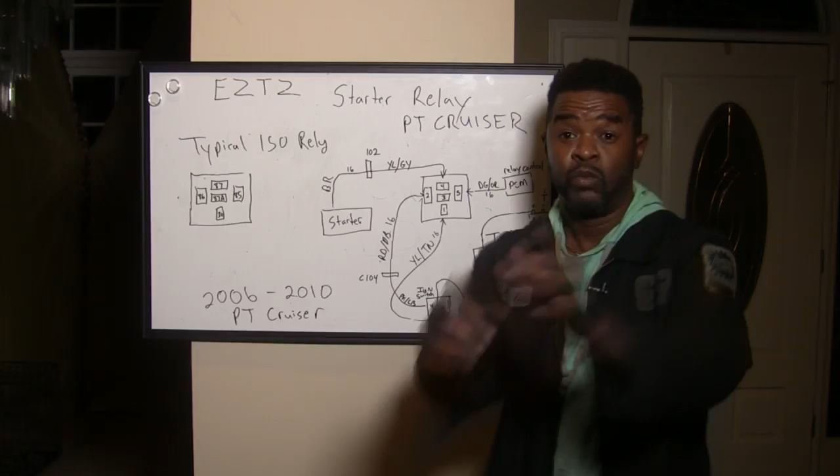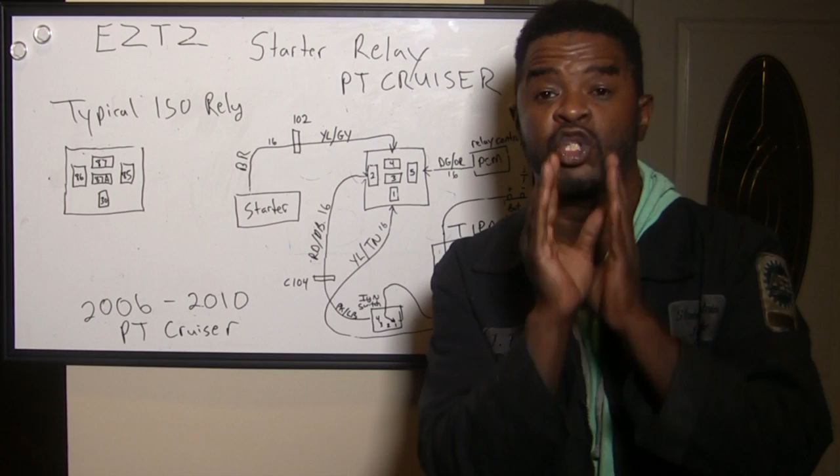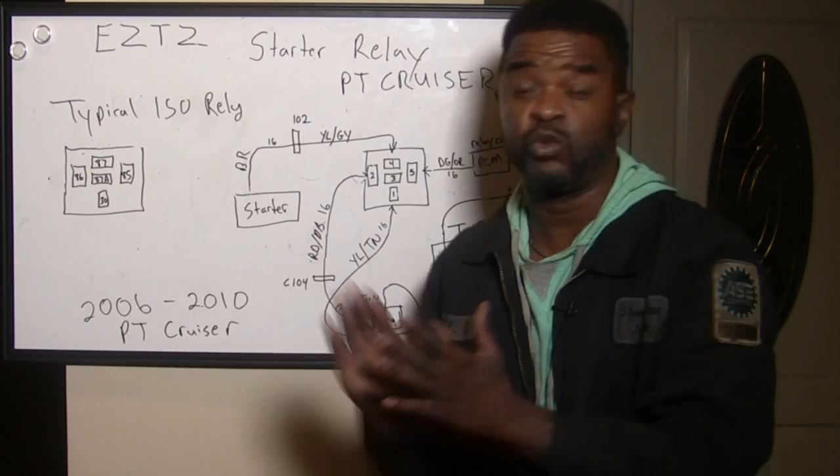I want to go over the typical starter relay. I had a buddy send me a message a couple of days ago. He happened to be working on an 08 PT Cruiser. In this video, we are basically dealing with a 06 through 10 PT Cruiser, but this diagnostic applies to all cars utilizing a typical ISO starter relay.

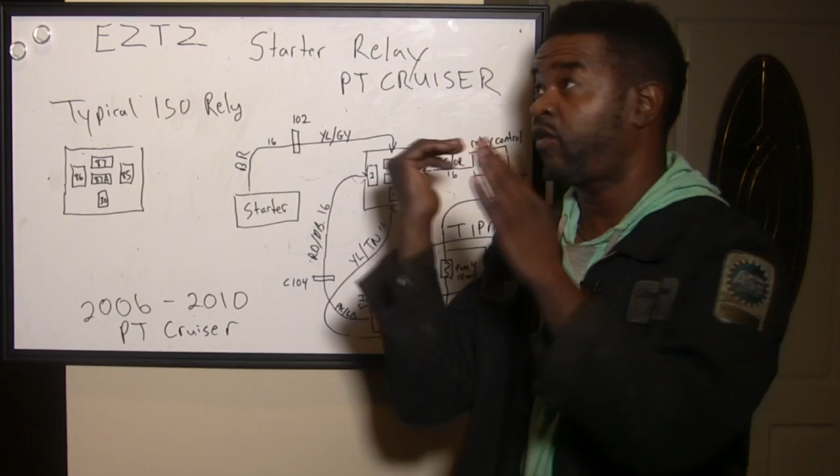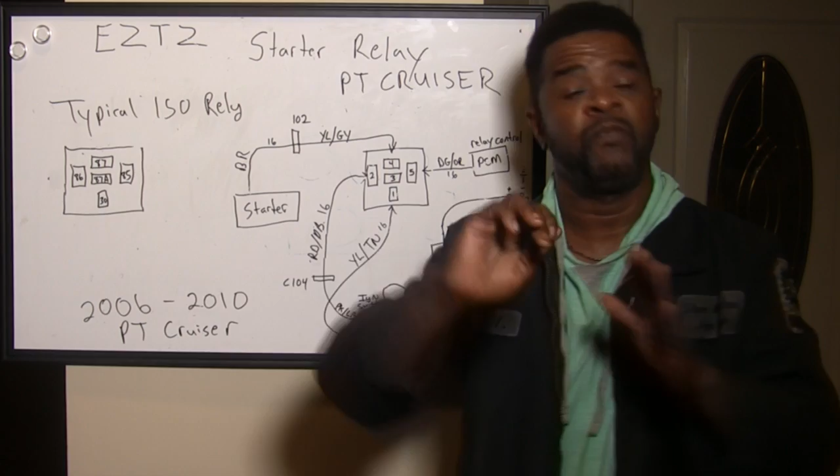And pretty much most of them utilize a starter relay to send power to the starter to allow cranking. Also keep in mind this video is for a no crank complaint, not a no start. So if your car's spinning over, cranking, this video is not for you. We're dealing with a no crank, meaning when you turn the key, nothing happens. You hear absolutely nothing. That is a no crank.

We got to get that description and that complaint accurate, so the technician working on it could have an understanding of what you're talking about. So we're dealing with a no crank and a typical starter relay. We're gonna go over all this diagnostic when we get back.

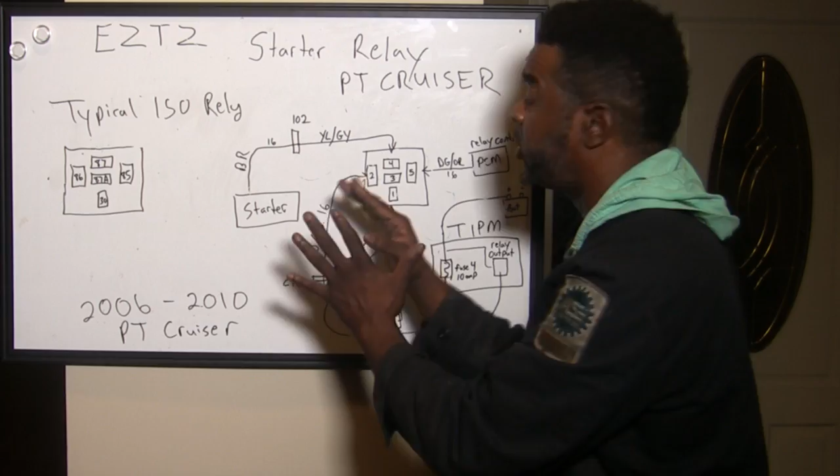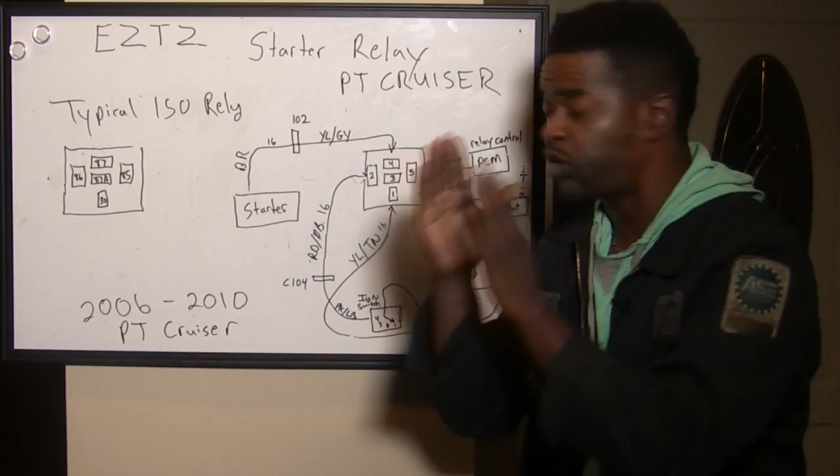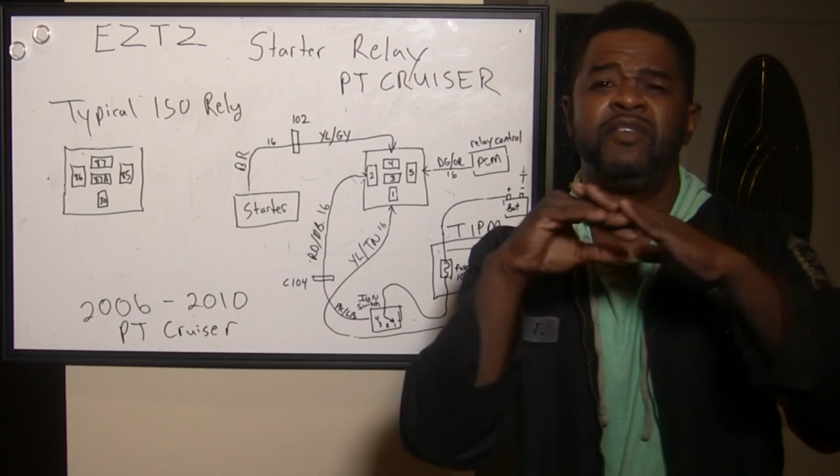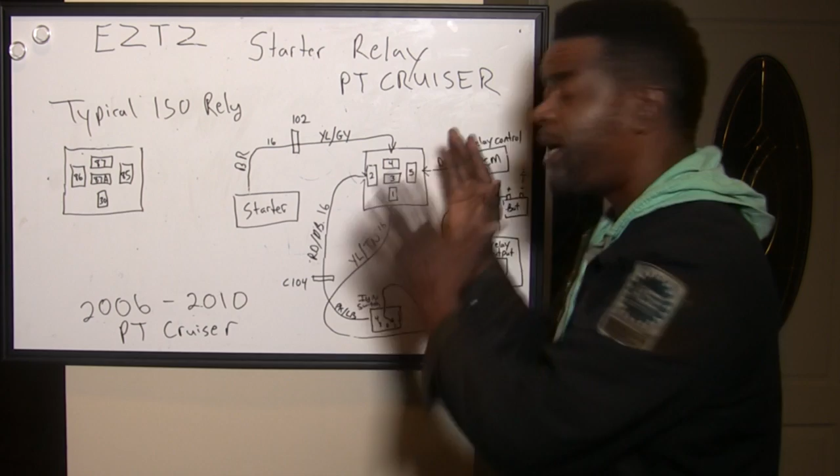We're talking about a no crank situation on a PT Cruiser. But this diagnostic applies to all cars. So I'm not going to even name the video. Well, I may name it PT Cruiser just to draw in the PT Cruiser crowd, because we're basically dealing with a 06 through 10. That car came out in 01, but from 06 to 2010, the electronics changed. So the same theory applies to the typical starting circuit.

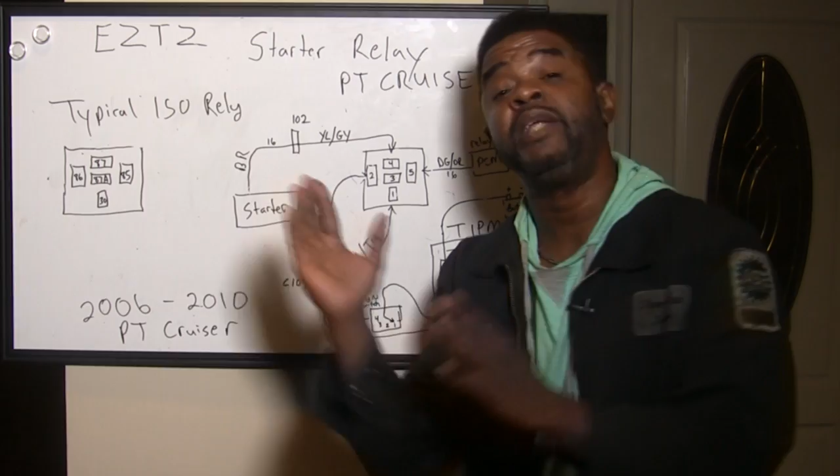Let's go over this typical ISO relay. You got a pin 30. Pin 30 is always gonna be hot, always have 12 volts on any relay, pretty much. And we're talking about a typical ISO relay, International Standard Organization. 86 is pretty much gonna be power supply from a switch. In our case, we're dealing with an ignition switch supplying a 12 volt switched circuit to the relay.

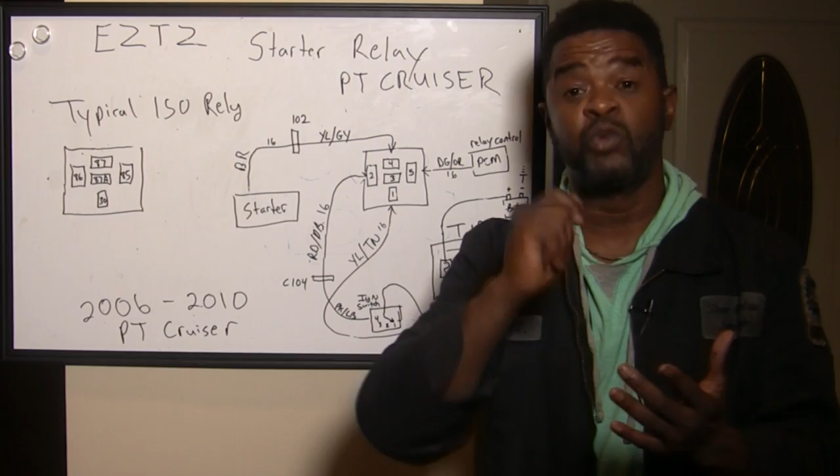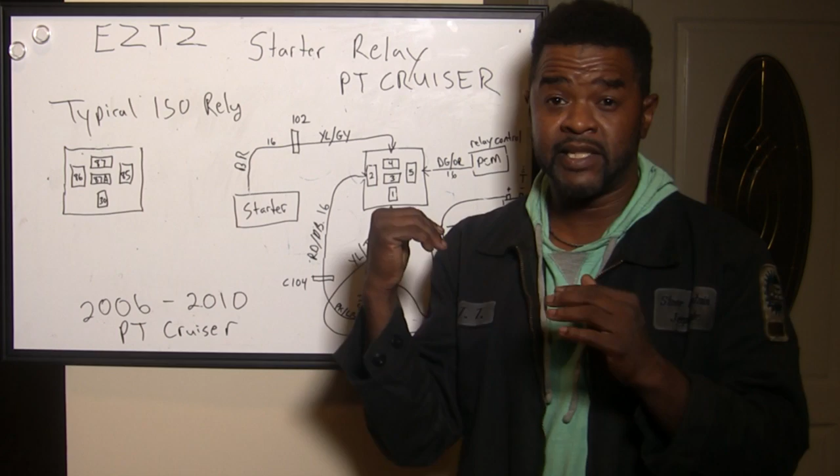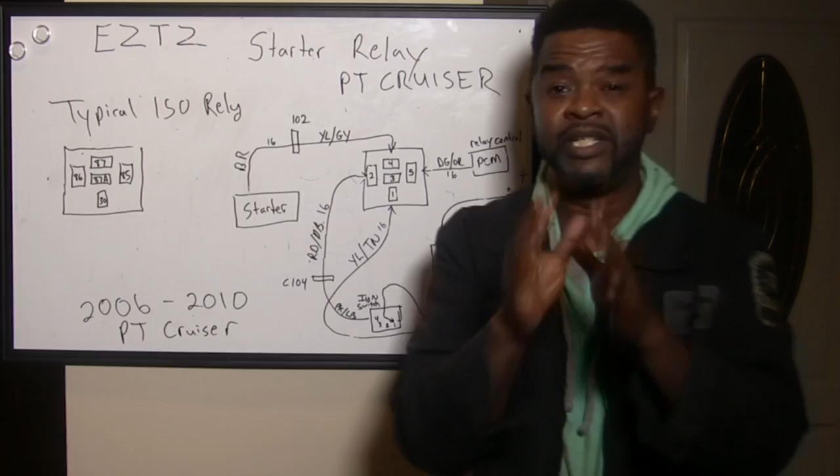Now, 85, not always, some cars utilize pin 85 differently. Some of them are hardwired ground, but in this case, we're getting that ground signal from a computer, the PCM. And 87 is actually the load, meaning it's going to send power to the circuit load in question. In this case, the starter.

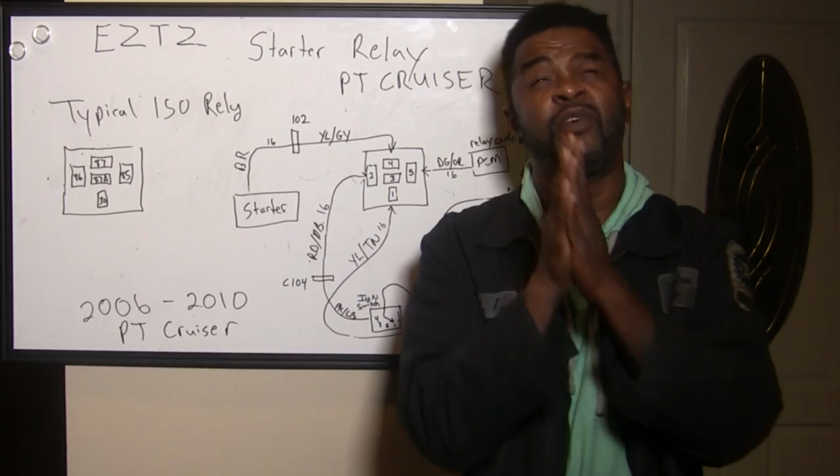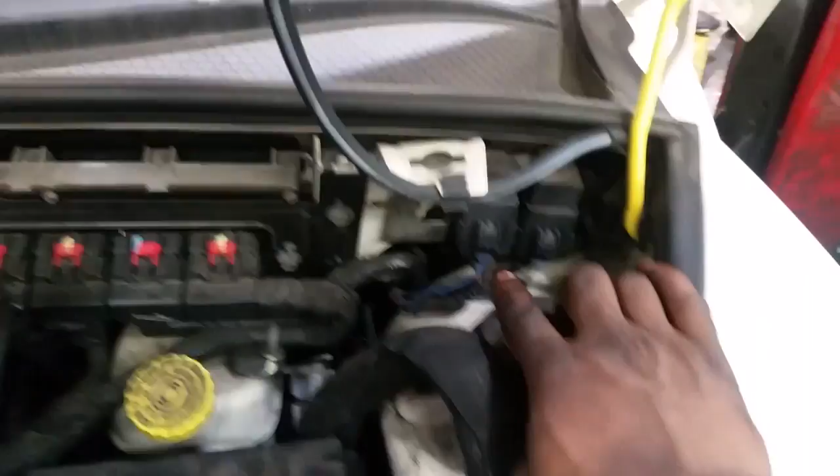Let's go over these pins. That starter relay on a PT Cruiser is on the driver side firewall. But you got to be careful because it's right next to the ASD relay, so you don't want to be diagnosing the wrong relay. It's on a bracket. Grab both relays. Look for the yellow gray wire, red dark blue wire, yellow and tan wire, dark green and the orange wire. But I can show you what it is right here.

Now let's go to the relay, because this is where the diagnostics come in. Remember when I said pin 30 always has to be power supply. In this case, Chrysler, in the wiring diagram, labels them 1, 2, 4, 5, 3. So we're going to do it that way. Pin 1 should be power supply. Grab your test light, hook it up to ground, and see if you got power supply right there. You should. If you do, good. If not, you got more diagnostics to do.

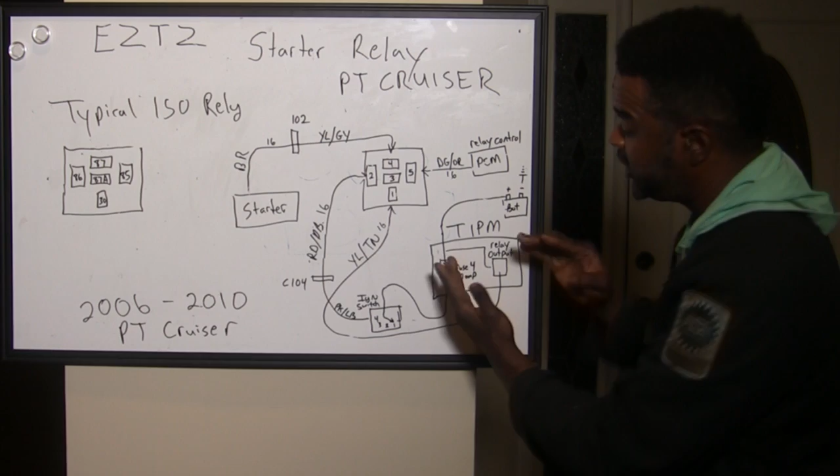Pin 1 goes to the relay output inside of the TIPM. So if you don't have 12 volts right here, chances are this fuse is blown. And if that fuse is blown, you got other problems, because fuses don't blow on their own. Because this circuit is only on the starter, if this fuse is blown, you might have a shorted out starter. But you need to do the proper diagnostic to find out if that's the case.

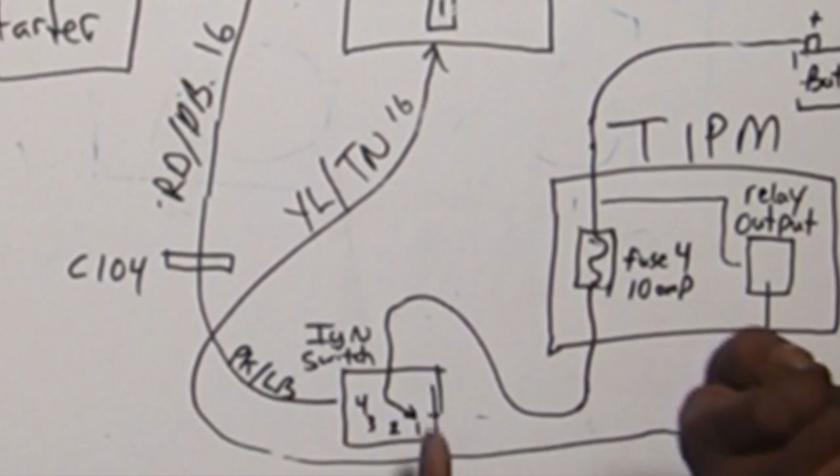Let's assume you got 12 volts right here. Let's move on to the other pin. Pin 2, remember I told you that's the switched power supply circuit. In this case, it's the ignition switch. The ignition switch is on pin 1. So when you turn the key, power supply should switch over to pin 4, which goes to pin 2.

Now, if you stick the test light right there on pin 2, if you turn that key and you're not getting 12 volts right there, again, you may have a blown fuse, because that is fed through fuse number 4, which is a little bitty small 10 amp. All right, 10 amp fuse, man. That's all they're protecting that circuit with.

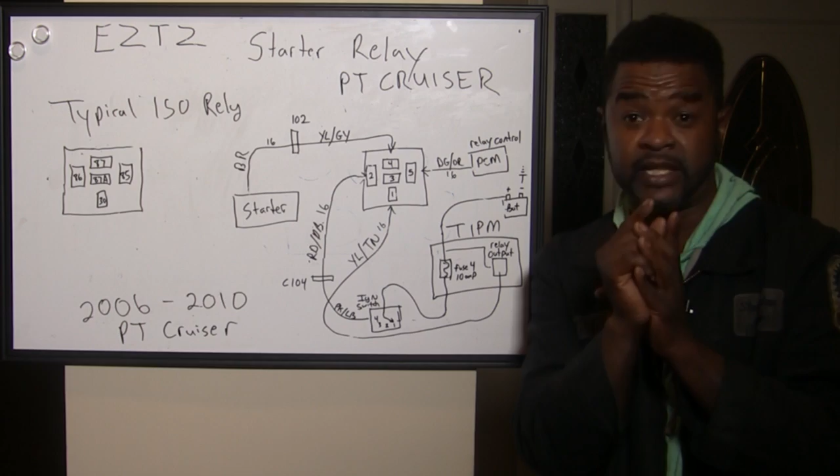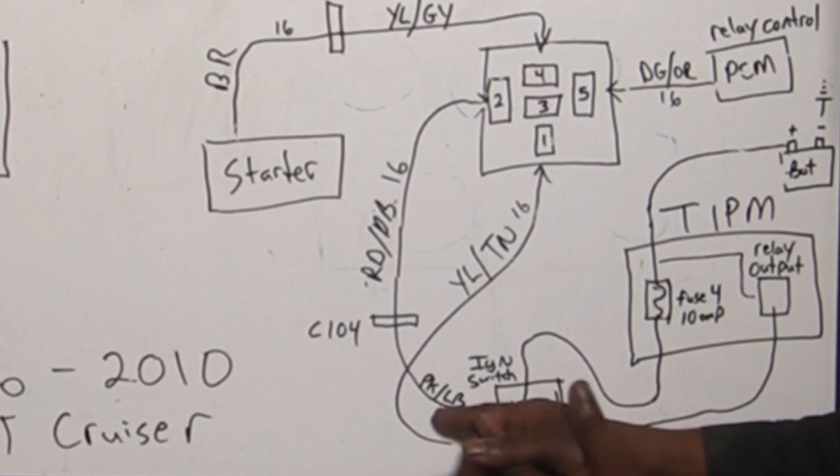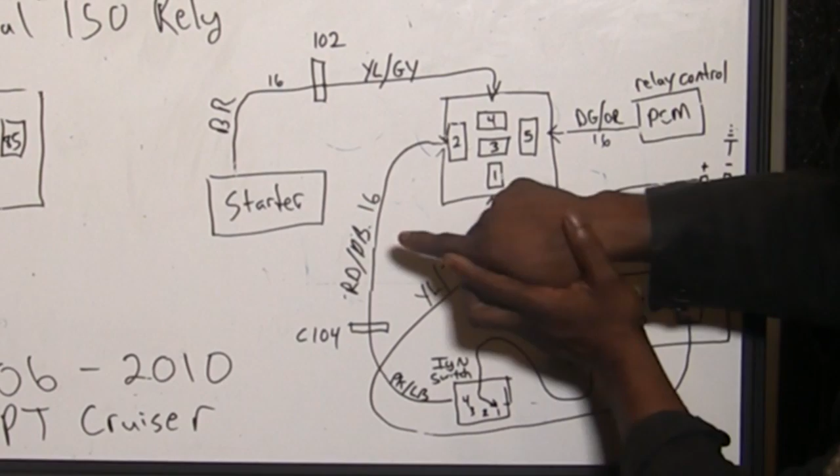All right, let's assume when you turn the key, you get 12 volts right there, because that's what you should be getting. Again, if not, you probably got a blown fuse, or open circuit and ignition switch, because let's not leave that out. All right, this is a pink and light blue wire, and that circuit goes through a connector, which is connector 104, and then the wires change color. All these are 16 gauge wires. The wires change color to red and dark blue. So at that relay, the red and dark blue wire should have 12 volts on it as you turn the key on and off. Let's assume it does.

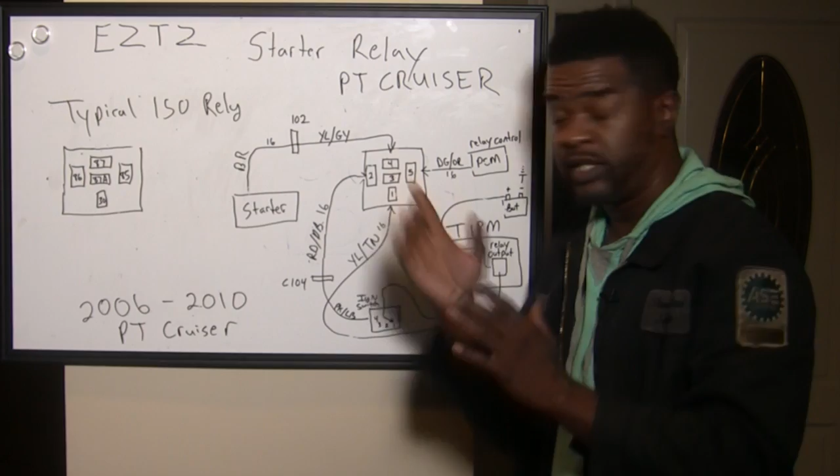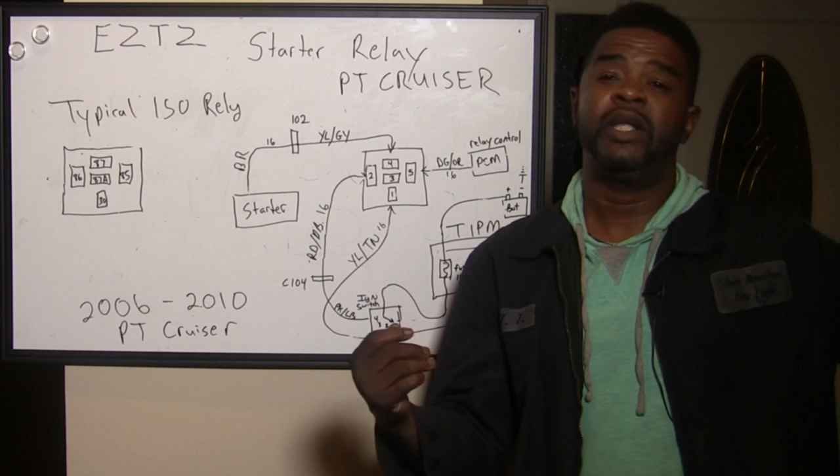Moving right along. Pin number 4, which is basically 87. Remember I told you that's your load circuit. That's going to the load that you wish to turn on. In this case, the starter is the load. All right, now a quick way to verify that this circuit is complete is to actually physically, manually put 12 volts on pin 4. So take your red wire, it doesn't have to be red, it could be any kind of wire, one end to a power supply, maybe the battery, and stick that same wire in pin 4. If that starter motor cranks, that circuit is complete.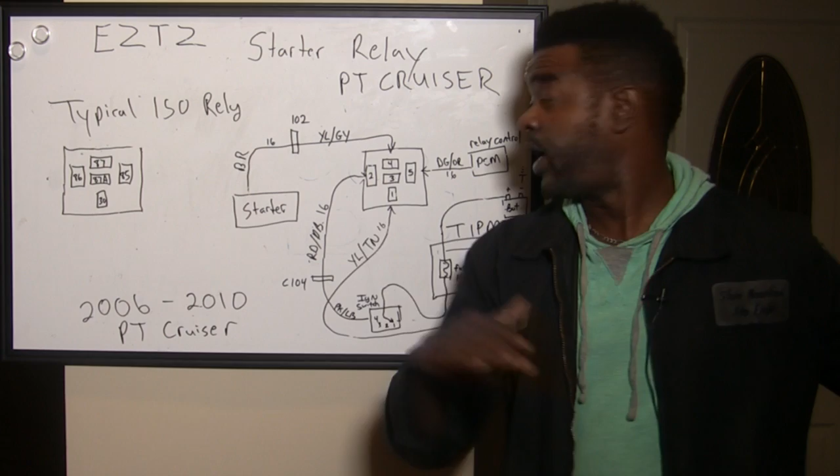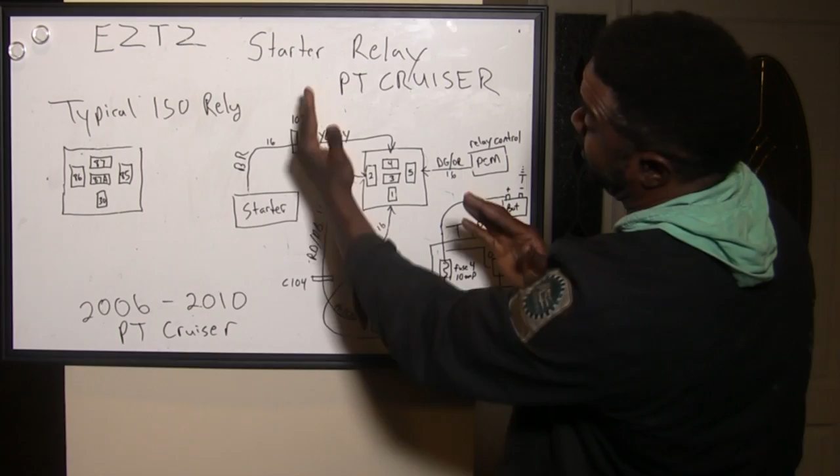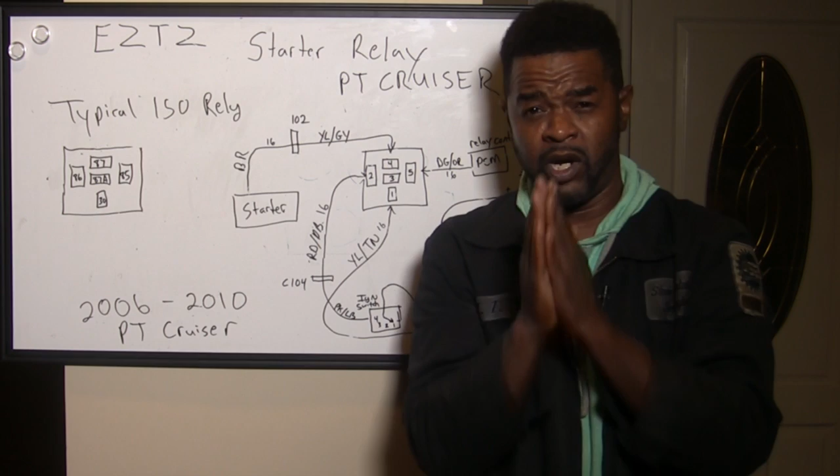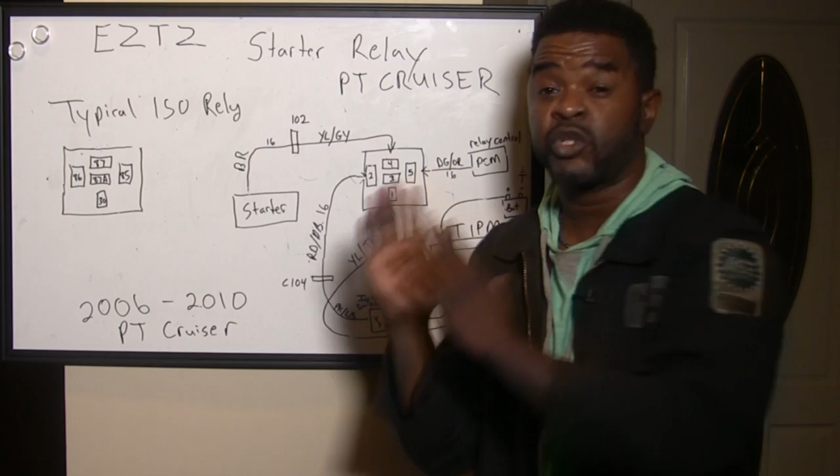All right. Now, if that starter motor doesn't crank after you put 12 volts right there, there's a couple of issues that could be going on, because we got a connector right here, connector 102. It could be open right there. As you can see, coming from the relay, the wire is yellow and gray. At this connector, which is connector 102, it changes color to a brown wire. So basically, take the brown wire off the starter. Have someone turn the key, see if you're getting 12 volts on that brown wire. If you are, while you're turning the key, 12 volts, then the circuit is complete. You pretty much got a shorted or open starter motor itself.

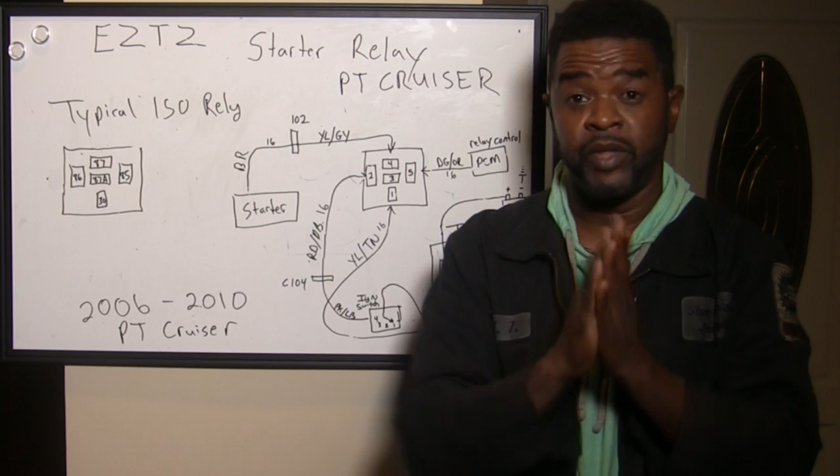But keep in mind, we're discussing no crank. Now some starters will play games with you. Some of them will click. As you turn the key, you get a click, click, click. Now, you can pretty much assume that the circuit is complete. You just got a shorted out starter motor. All right. But we're not going to assume, we're going to actually do the diagnostic.

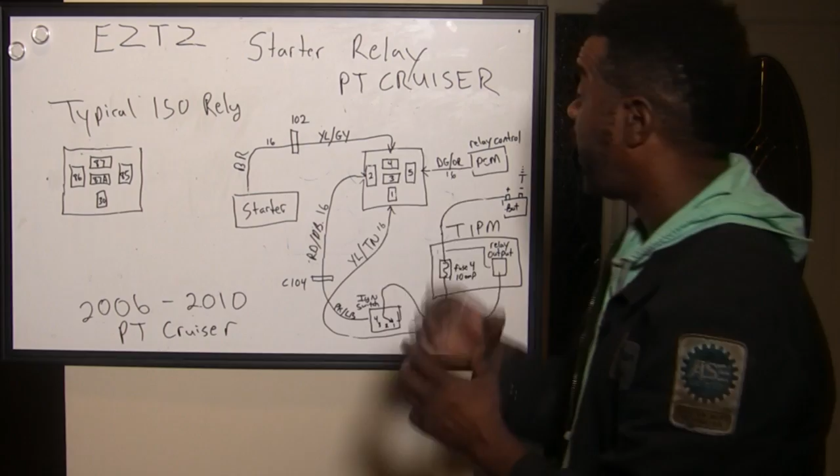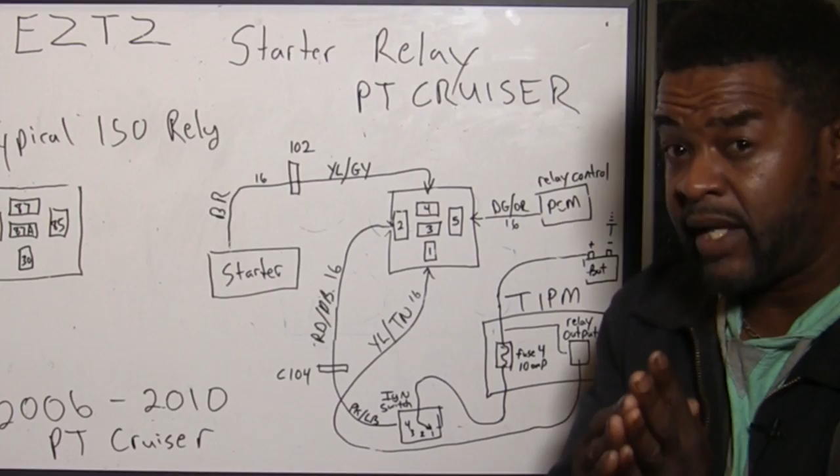Now, let's assume this circuit is complete, because you verified. You put 12 volts right here, and a starter motor tried to crank the car. It spun over. Now, that pretty much means the relay circuit is good. You could either have an open relay or internal short in the relay. So verify that all these pins are doing what they're supposed to do. You should have a ground signal right here at pin 5, which comes from the controller, the PCM.

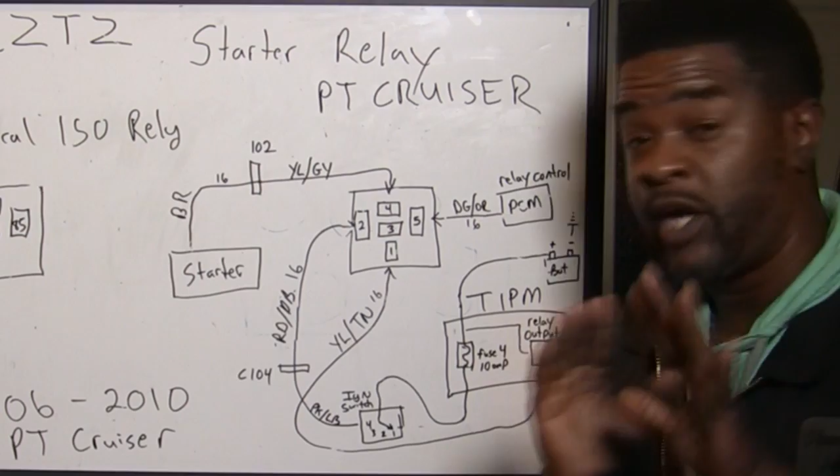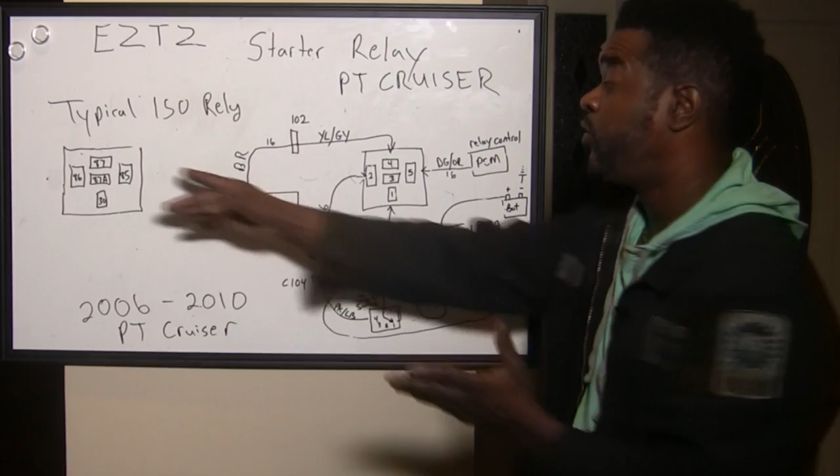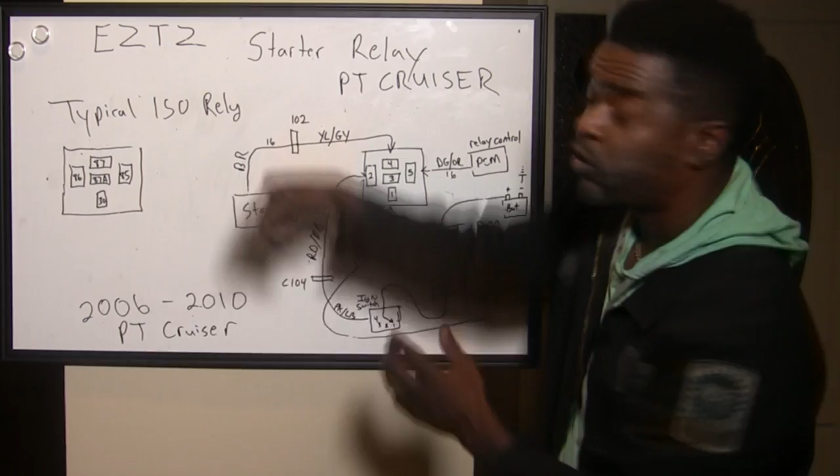Now you got to be careful with that, because this is a lot of the reason why you get no crank. Your circuit can be complete and everything, but if this ground is not there on pin 5, which is basically pin 85, you're not going to start, because you got to have power supply and a ground to energize that coil and cause power supply to go to your load, which is your starter that we're discussing. If that ground is not there, nothing's going to happen.

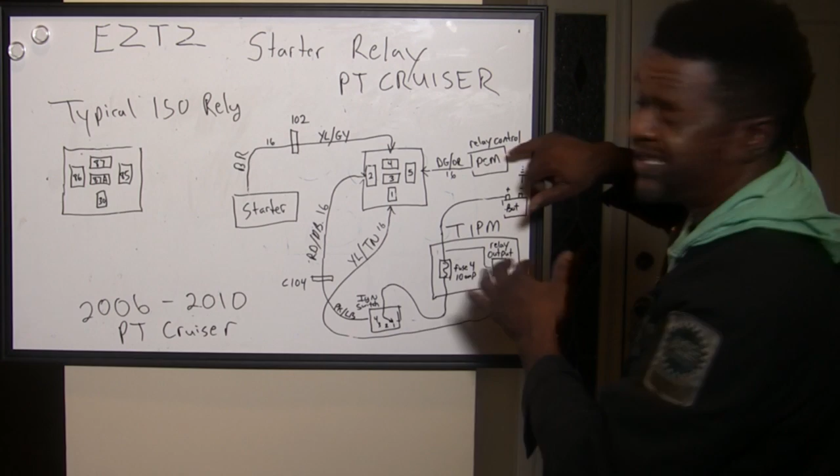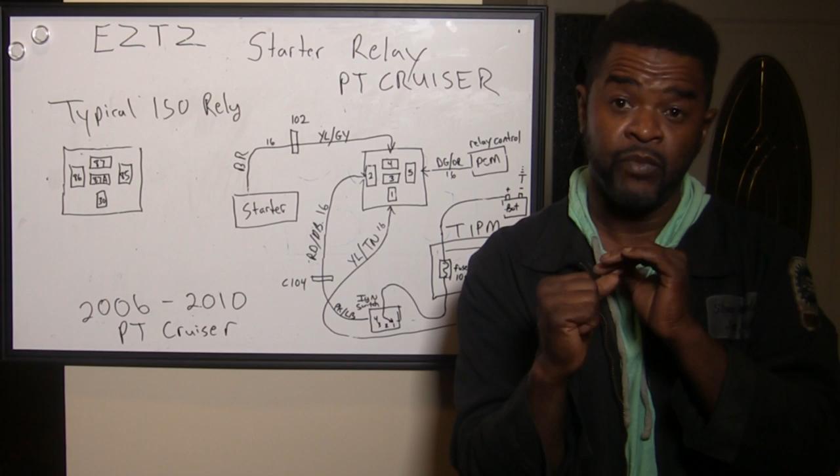Now, most cars are looking for inputs in this controller to allow that ground. In the PT Cruiser's case, we're looking for park or neutral input. There's a couple of inputs it's looking for. The park and the neutral input, meaning your car has to be in either park or neutral to close that circuit and allow ground to go to that starter relay. If it's in reverse, that's a safety device. That's to not allow you to crank the car while you're in gear. Say you're in reverse. We don't want you being able to crank the car, because you might jerk and damage something.

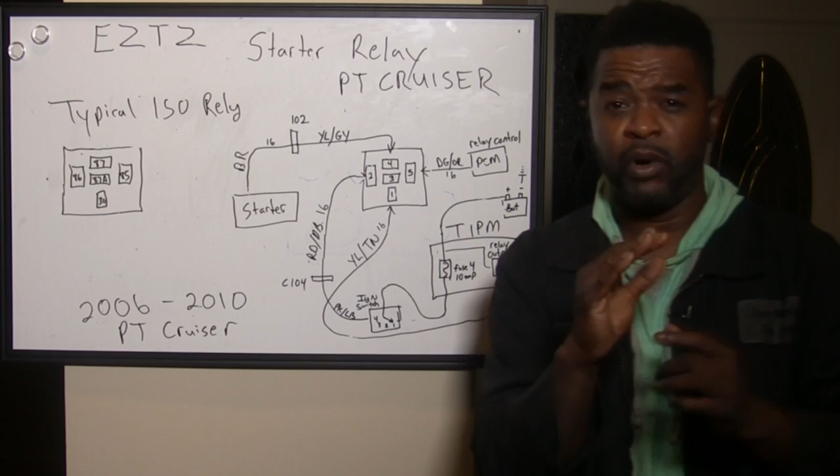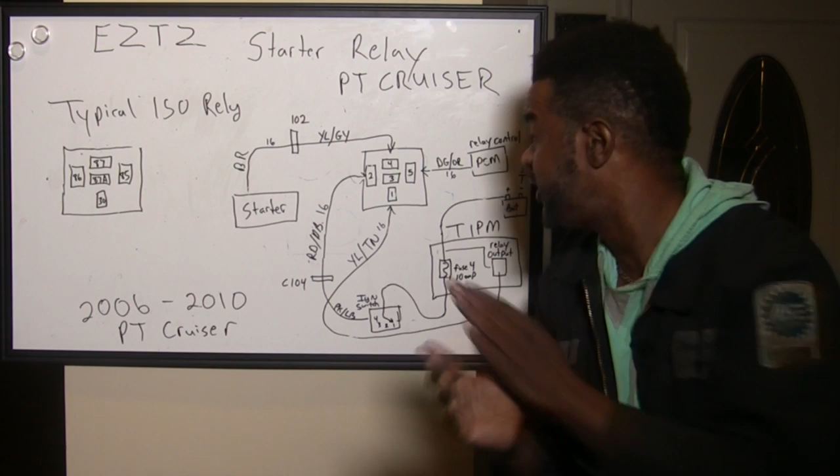So if the car is not in park or neutral, that's one of the inputs, it's not going to allow the ground to go there. Another one is the security system. That's right, man. The security system circuit has to be complete to allow that ground to go over to the starter relay to allow cranking.

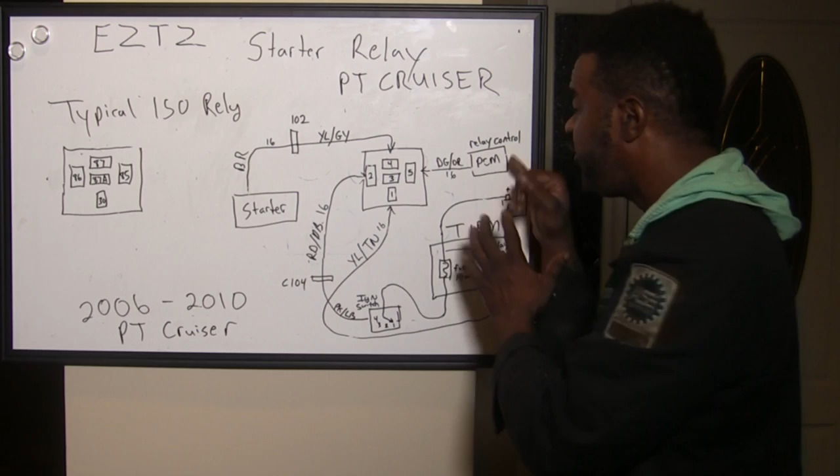Now, all these cars, 06 through 10, are equipped with what we call a security system, SKIM module, a digital electronic key, which is basically for theft purposes. Okay, you can't start the car without the proper key. So if you don't have the proper key and you're able to turn the ignition, you're never going to get that ground signal from the PCM, which will allow cranking.

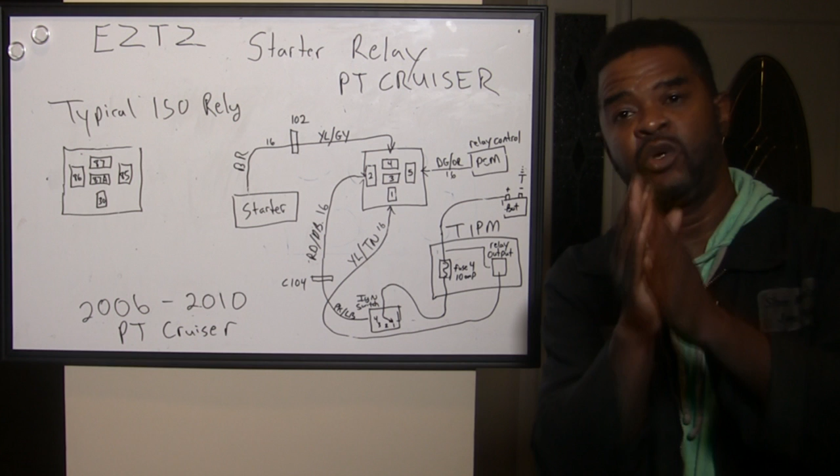So we're going to assume both those inputs are there. You're either in park or neutral, and your SKIM, or your computer, is not assuming someone's trying to steal your car. That's another reason why it would take that ground signal away. All right, so we got the whole circuit complete.

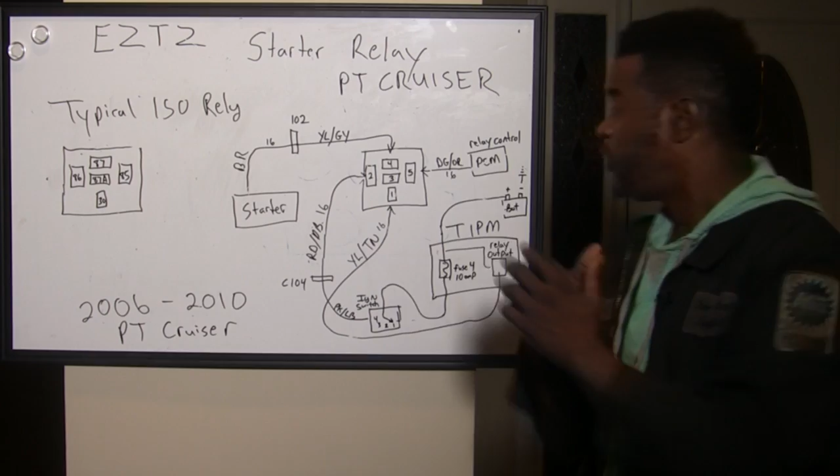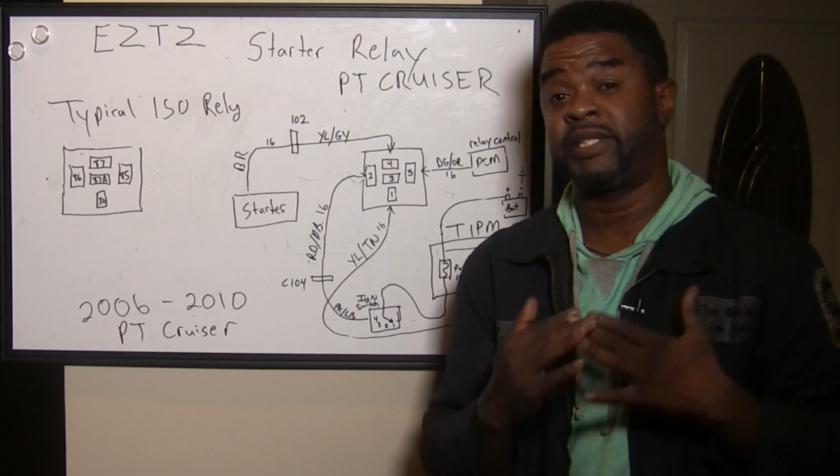Now let's use an example. You turn the key, nothing happens. Absolutely nothing happens. First thing, easiest thing to do, I'm a tech, so I can talk to you technician to technician. What I would do is go to this relay, basically, like I said earlier, manually stick 12 volts right here. If the starter spins over, that circuit is good.

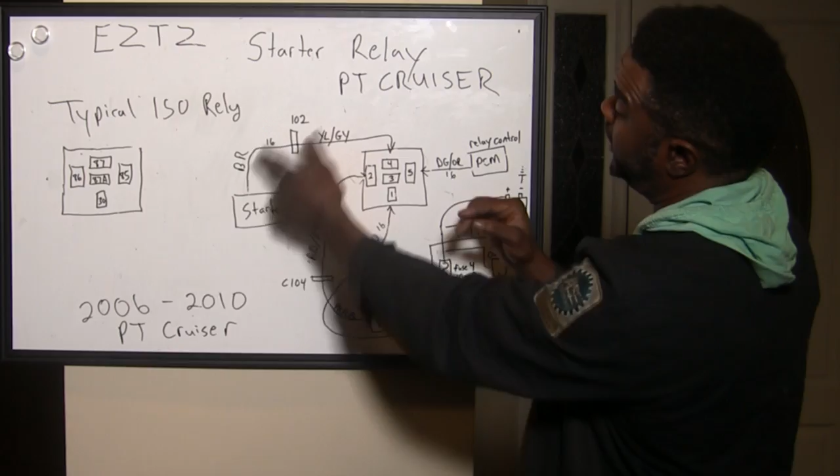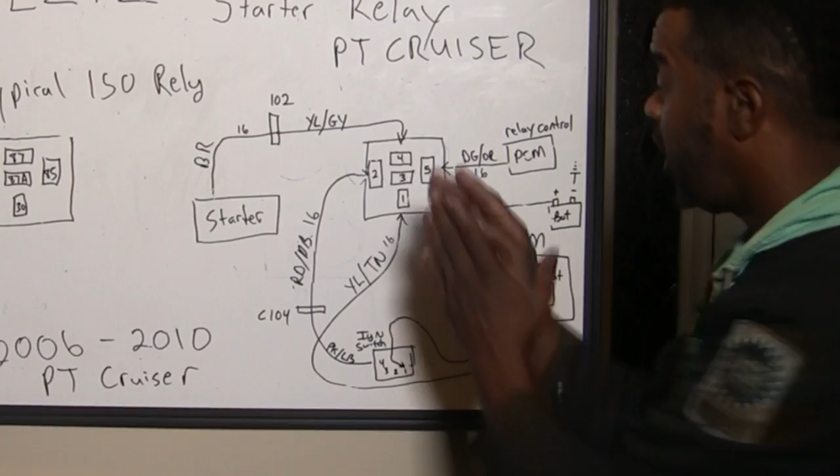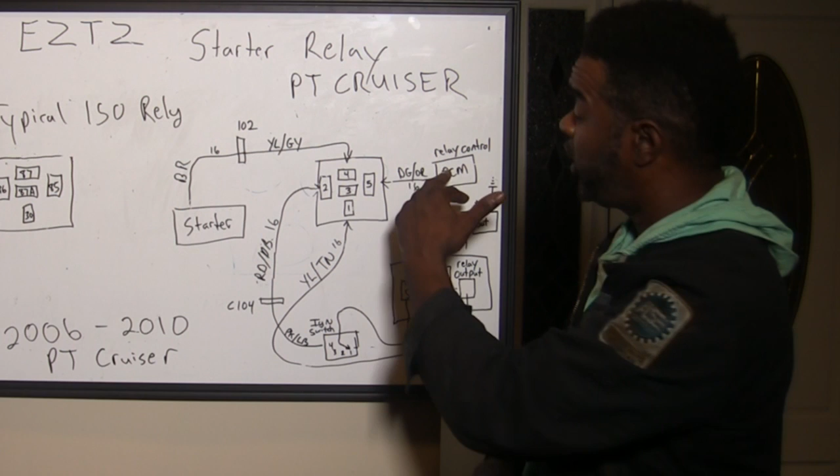All right, I will verify I have 12 volts right here on pin 2 as I crank the car. Yes, I do. I will also verify that I have 12 volts right here. Yes, I do. Basically, one of those pins is open. You're probably not getting ground from here. Like I said, I went over two of the inputs, one being park neutral and the other being the SKIM module. Okay, so we got to verify.

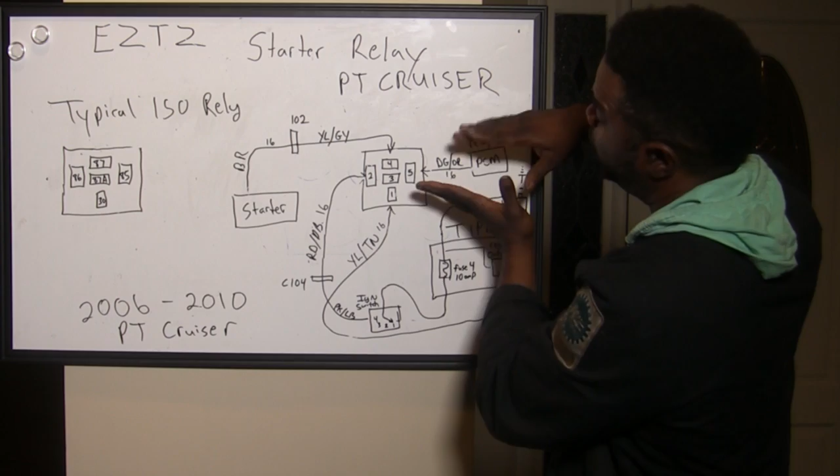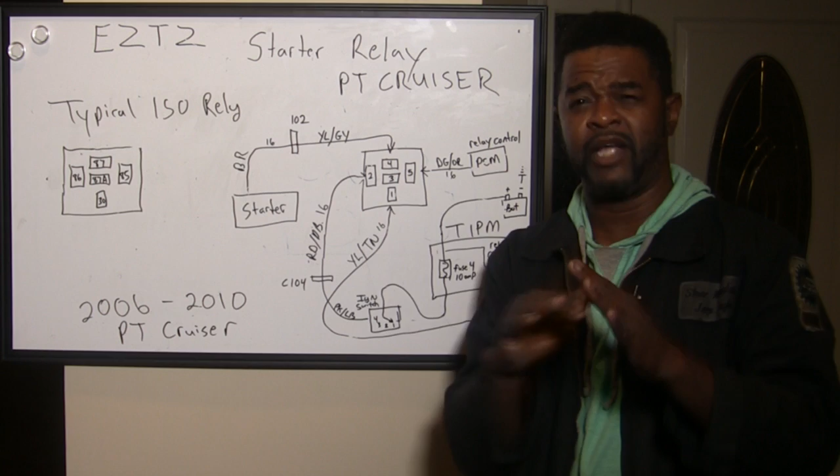Now, what you can do, pull the wire out of this circuit and manually put a ground wire right there and try to crank the car. If it starts, then you either got, I don't like the term bad, a shorted PCM or the inputs are not there. Now, to verify that the inputs are there, you're pretty much gonna need a scan tool, because you can literally be in park or neutral and still not be getting that input. That's why I say a scan tool comes in handy for diagnostics like this.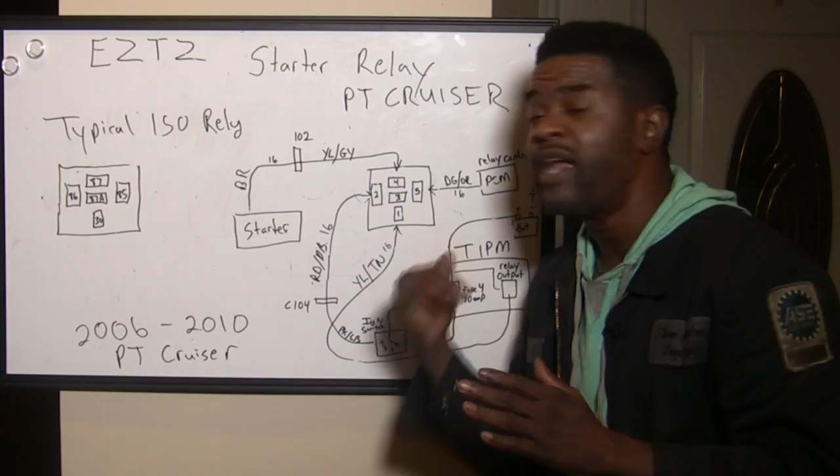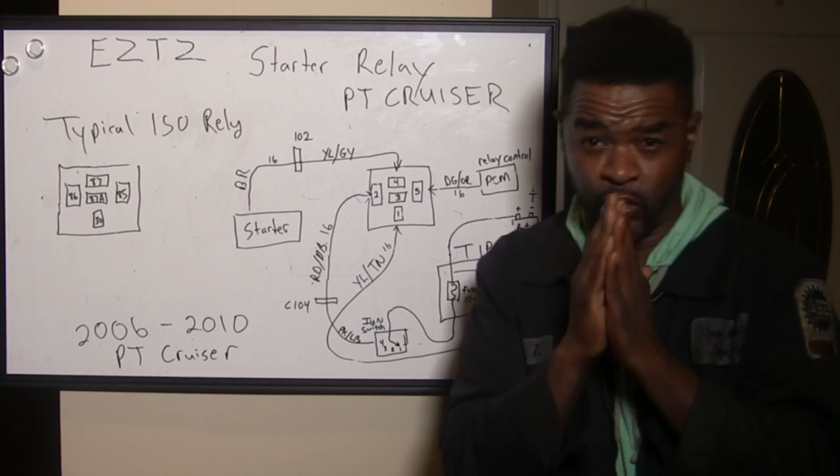Especially on that SKIM module, you're really gonna need a scan tool to look at the inputs to verify that you're getting the proper input from that SKIM module to allow cranking. And that's with any car. If you don't have a ground signal at pin 85 of a typical ISO relay, or pin 5 in this case, you're never gonna crank. You got to have this ground and this power source at pin 1 and 2 as you're cranking, and that's what sends the load over to the starter.

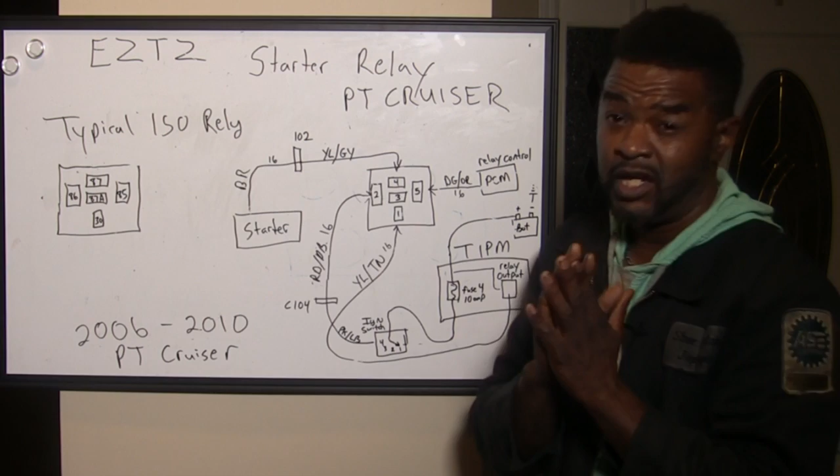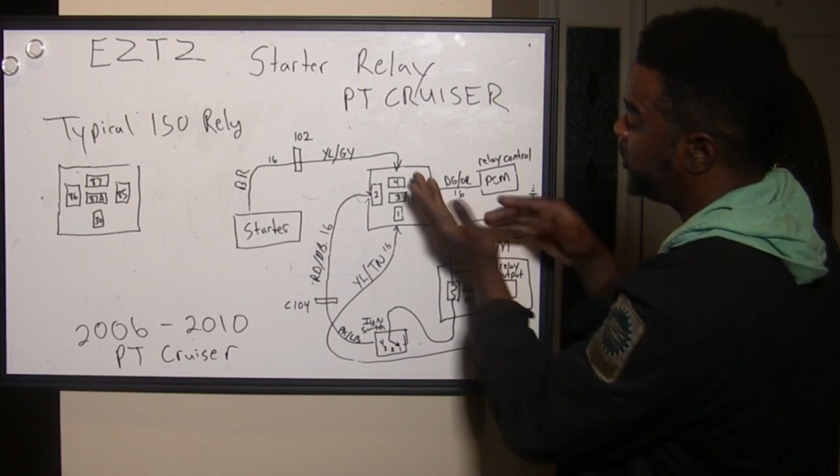Okay, so I pretty much wanted to go over this with you. If your issue is no crank, I would definitely check right here. Basically, I would manually put a ground on pin 5. You don't want to do that with that circuit tied into the PCM. So I would move the pin out of it and manually put a ground there and see if it starts. If it starts, then either the inputs are not there or the PCM is internally shorted.

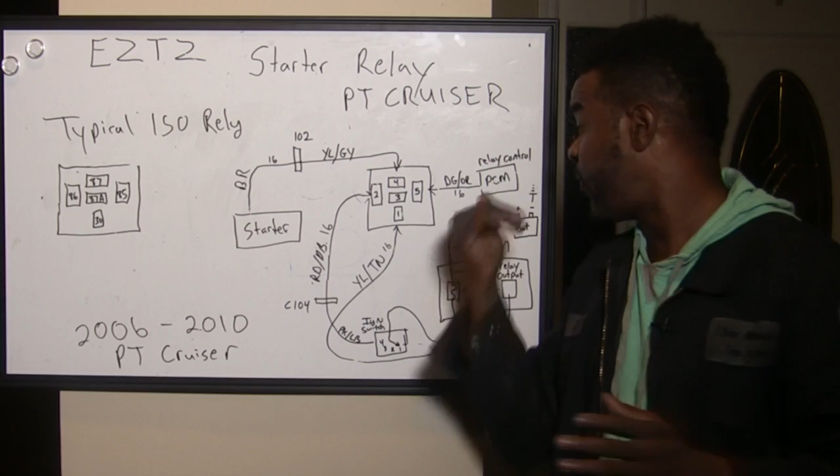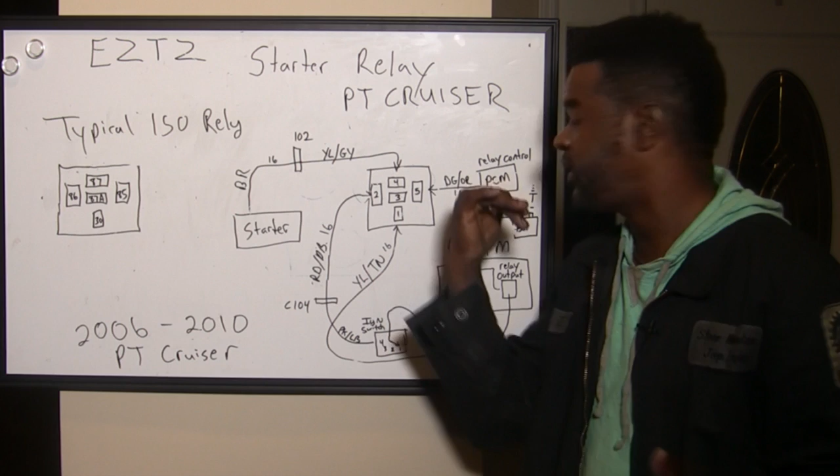Now, you can't just go grab a used PCM and put it in this car. Pretty much any of the new electronically controlled cars have to be programmed. But you can use a used PCM. It just has to be programmed, pretty much by dealer personnel with the proper scan tool that will allow you to do that.

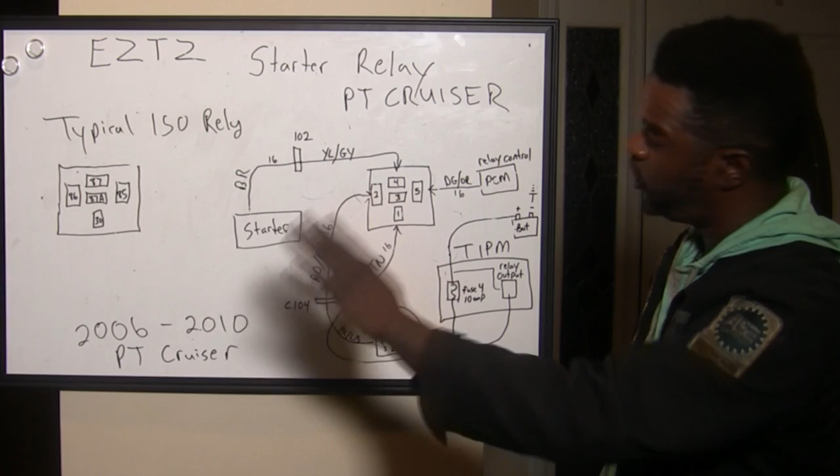Okay, I wanted to keep this video short. So you got a no crank situation. Here's the circuit. The ignition switch. You got to have switched power. If you're not getting power right here, check the output of your ignition switch. This is the pink and light blue wire. That's a connector on the ignition switch. Verify that at that pink and light blue wire, when you turn the key, you're getting 12 volts right there.

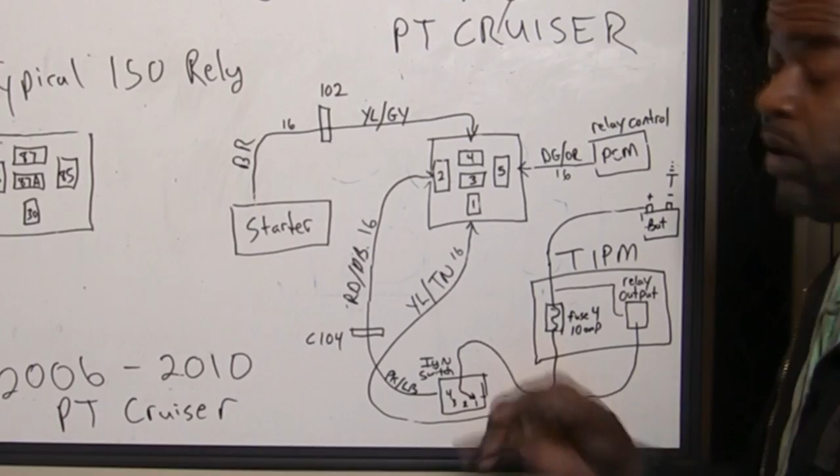If not, you could very well have an open ignition switch, because if the power supply is at the ignition switch from the fuse, then you pretty much have an open. I've seen the ignition switch cause a problem with these cars too. So that's it. That's the proper way to diagnose a no crank situation on a PT Cruiser, but any car for that matter. Any car utilizing a typical ISO relay to control the starter motor.